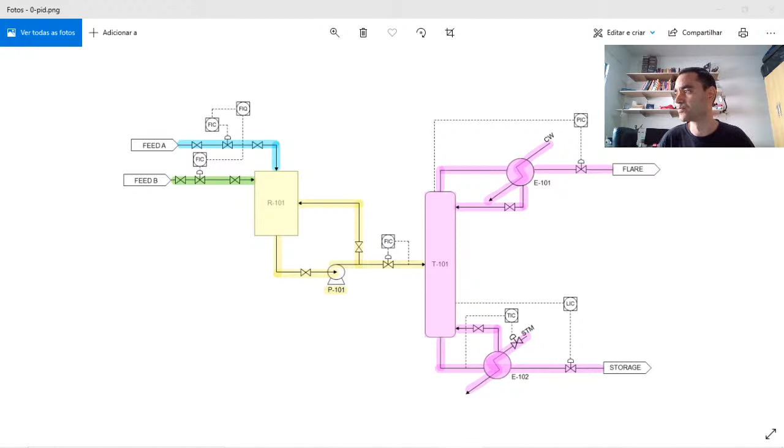Let's see here. Let me share with you another drawing.

So you can see here that it's a very simplified drawing. It's a process flow diagram, and it's a good start. As a fresher or an experienced process engineer, you are not supposed to lead a HAZOP meeting. But when we are getting more experienced, it's not desired, but people expect that you are able to lead HAZOP meetings. And a difference between these that you can see is very simple: we have only the main controls and the main equipment.

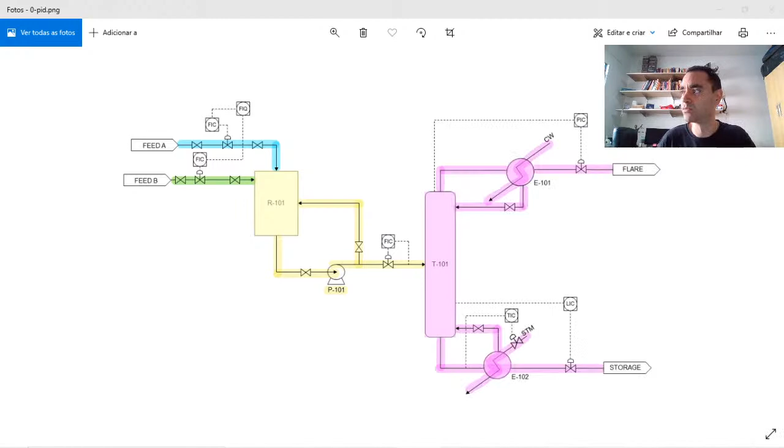Now I will share with you the pipe instrumentation diagram sheet. I removed the stamp, and you will see that the drawing is different because in the pipe instrumentation diagram we have the line name, the line tag, we have field instrumentation, and we have the alarms shown in the drawing. So the main document to be used during the HAZOP is the pipe instrumentation diagram. Although we need some other documentation to support the HAZOP, like the layout or the safety data sheet of the components, the truth is that the pipe instrumentation diagram is the main document if we are talking about industrial design, facilities related to chemical, petrochemical, oil and gas industry.

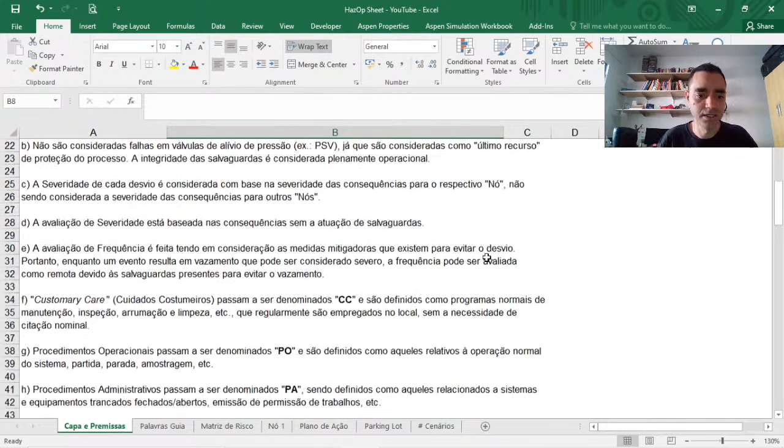And what I wanted to show you here is that we have in this system, it was a system with 4 subsystems.

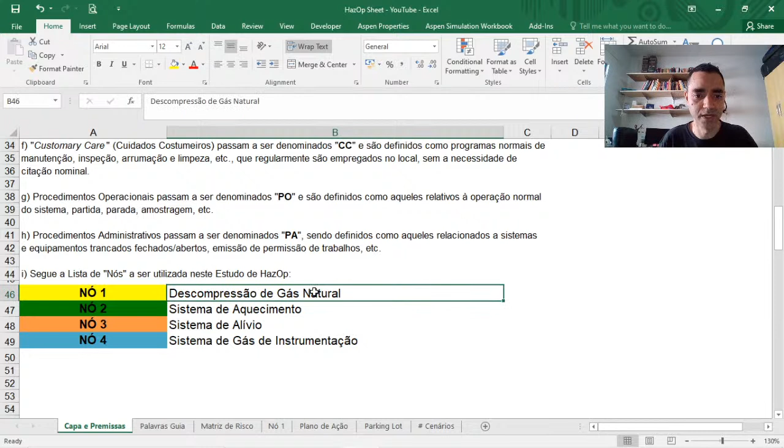So there was the decompression of natural gas, a heating system, the relief system, and instrument gas system.

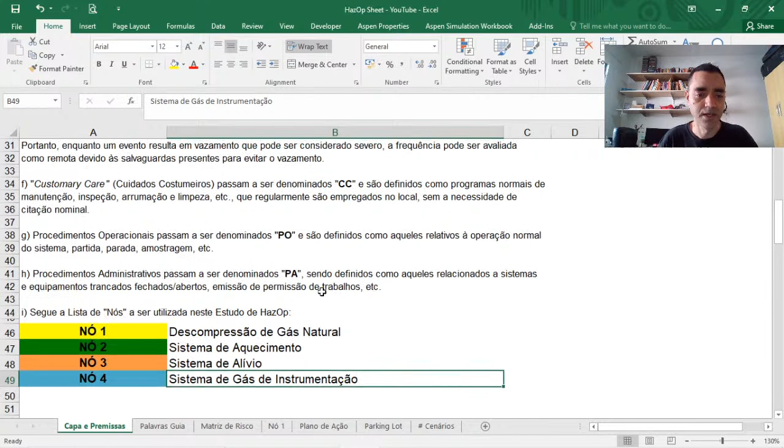We need to have well defined what are the premises of the HAZOP before starting the meeting, and sharing that information with the HAZOP team.

Before starting the HAZOP, it's very important that people are familiar with the process. The HAZOP meeting is not the time for people to get familiar with the process, because it will take a lot of time for everyone to understand what's happening and what's not happening. The HAZOP is to evaluate hazard and do hazard analysis, not to talk about the scope of the project.

It happens a lot if the team is not familiar with the process. It's not the time to solve specific issues. It's not during the HAZOP meeting that you fill an action plan - specific issues should be evaluated after the HAZOP meeting.

What I recommend, if you are leading this kind of process, is to prepare the material before the meeting and share it with people beforehand so they get familiar with it.

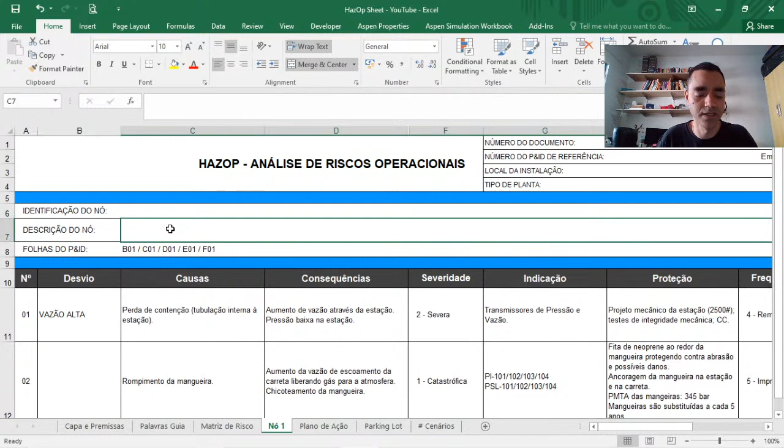So what I want to show you is that in a HAZOP meeting, we have the deviation, and the deviation is related to the guiding words. So the guiding words will help you to identify the deviations of the process. And what is the high pressure in a HAZOP analysis? The high pressure, low pressure, or the guiding word high, guiding word low, is higher above the normal operating conditions or less than normal operating conditions.

If I have a process that can operate between 10 and 20 bar G, what I will consider as high pressure is what is above 20 bar G, okay? And when I say operating range, it is different from the design range of a system.

So here in the node, we will identify the deviation, and with the guiding words, it is high flow in this case. In the node, we will identify what are the causes of this high flow in the node.

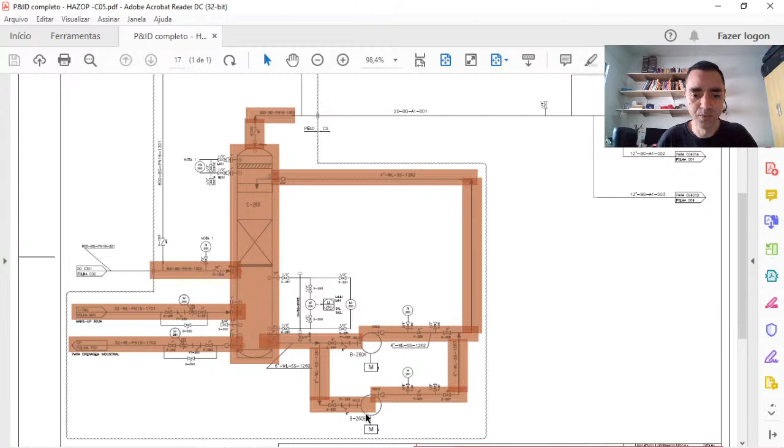Let's suppose that we are verifying... let me return here. Let's take this drawing as reference. It is not the same drawing that was used in that spreadsheet, just to clarify to you. But let's suppose we are evaluating the high flow in this node, and we are evaluating the high flow at the discharge of the pump. What can lead to a high flow at the discharge of the pump?

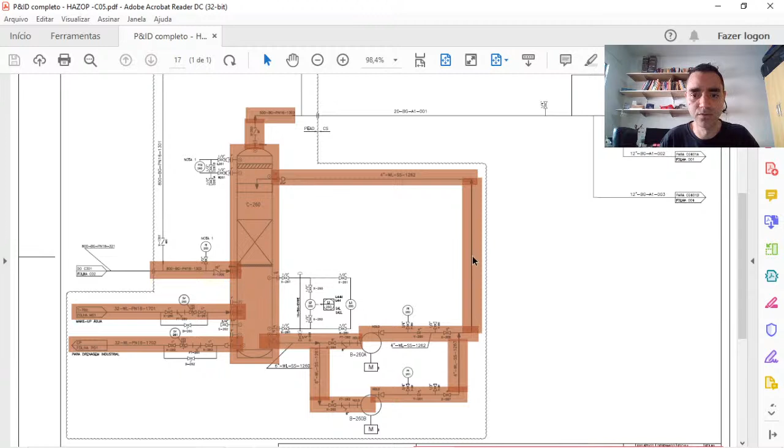And I can have high flow also if my tube ruptures for any reason. So if the tube ruptures, I will not have the pressure drop against the pump discharge, and I will lead to more flow through this segment.

So we list the consequences in the consequence tab, or the consequence column, and we verify what is the severity of that consequence, considering that we don't have any kind of safeguard to prevent the process from that. So the severity you will find based on the matrix of risk.

So I have the severities from neglectable - desprezável, and I'm not so sure if desprezável in Portuguese translates exactly to neglectable in English, okay? And we have moderate, severe, and catastrophic. So based on that, we choose what addresses more to the analysis.

And we need to have, before starting the HAZOP, a parameter to classify what is severe, what is neglectable. So we have here categories of severity. What is neglectable is an operation problem that is recoverable. So if it's something that is an operation problem but it's recoverable, I can classify it as neglectable. However, if the issue that happens can kill someone - internal influence - or if it can lead to multiple injuries outside my plant, I can classify that as catastrophic.

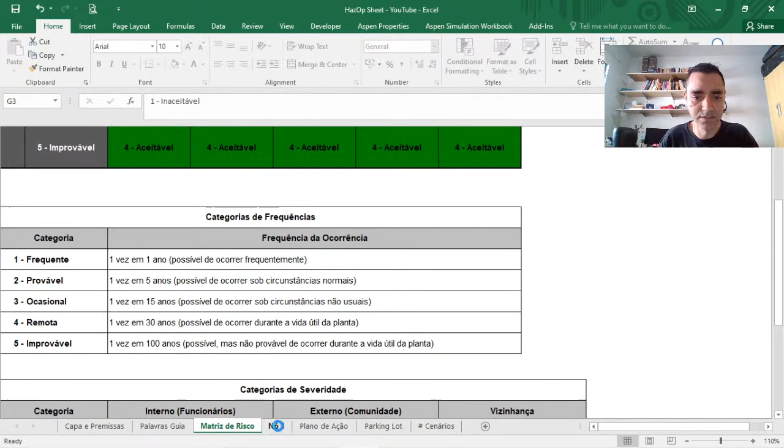If it's one time in 5 years, it's probable, and it's this way. So here, the chances that I have to break my pipeline, if I break the pipeline, what happens? Is it something severe? No, because at first sight I have water, recirculation water. So probably the severity is not high, it's a low severity.

And what kind of indication do I have in this case? We go to the instrumentation of the process, we go to the procedures of the process, and we verify how it's possible to identify that the deviation happens in a process. In this case, what I have is the level of the column, because I have an operating level, and if it decreases too much, I will know that, because in a recirculation loop it should be constant or more or less constant, since I have blowdowns from time to time.

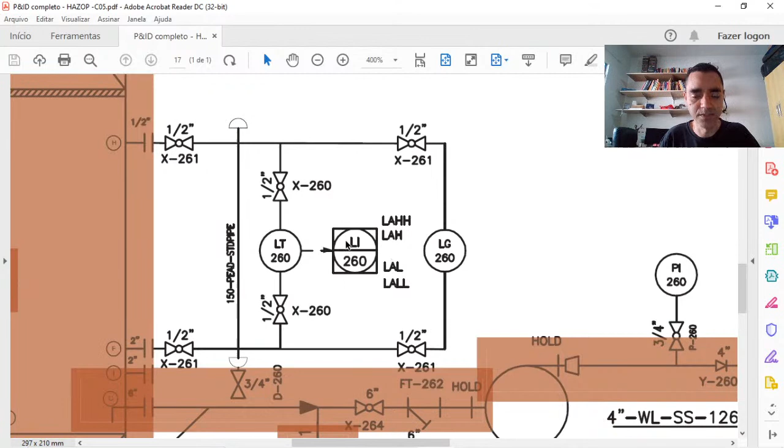And we add here the identification of the instrumentation. Here you can see that it is done in a generic way. That is not recommended. What is recommended is to inform the instrumentation tag. So for instance, in this case, we'll say that we have LI 260 that informs me if I'm losing the level of the column. So this way, I go to the team, or the HAZOP leader most often that fills this table, and I add the information here.

And the next column is related to protection. What protects the process from the hazard or from the deviation caused by high flow? What protects it is the design. I have chosen a material that handles the pressure and temperature of the system, so it will not break because of the process conditions. And it is located on the plot plan in a way that I don't have a truck that can crash into this vessel. So this is the protection that I can explain here in the protection column.

And based on the indications I have and the protection I have, it's time to classify how often this cause happens with this deviation. So here we consider all the safeguards, and we can classify it, for instance, as remote, because with all of these it's not expected to happen. How much is remote? In 30 years, I don't expect to have this kind of issue in my plant. So this is a reference that we have.

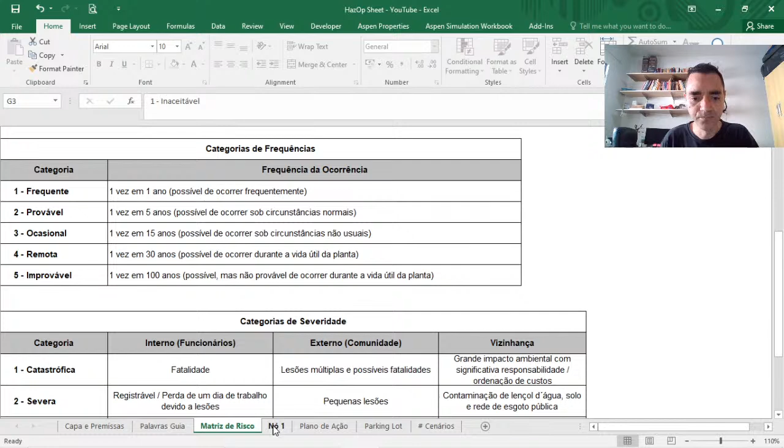So based on the severity and based on the frequency, the table does automatic classification. In this case, in the spreadsheet it is filled automatically, so we got to here. Let's change it. So, negligible. You can see that the risk is acceptable, and I am in the green region of my risk matrix. So should I add any other instrumentation, or create any other procedure to the system related to this deviation? At first sight, no, because it's already safe for operations, so you don't need to spend more time than needed to increase the safety of the process related to this deviation.

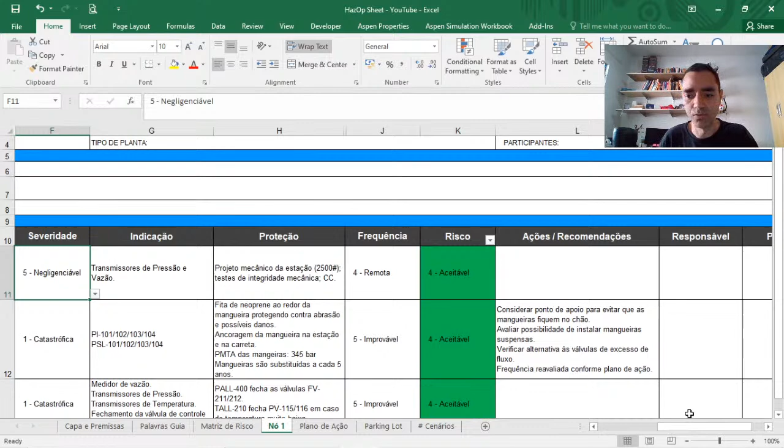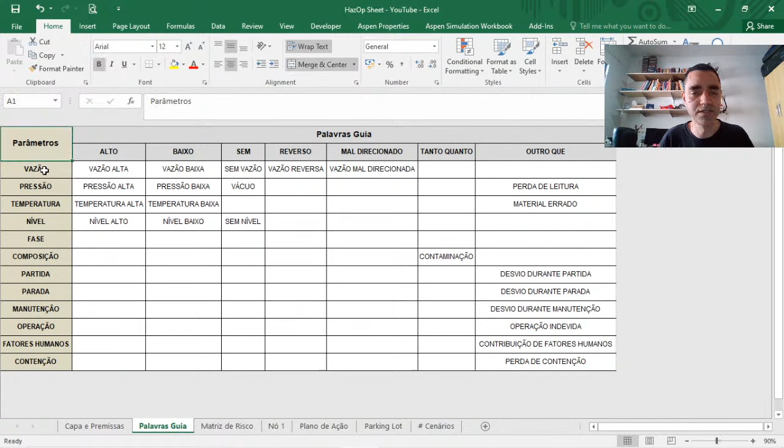So what the HAZOP does is to get the guiding words, and now instead of talking about high flow, we'll talk about less flow. And when we finish the flow parameter, let's go to the pressure parameter, and what can lead to high pressure, what can lead to less pressure, and we use all the parameters that make sense for that node. In this way, we will have the analysis of our system.

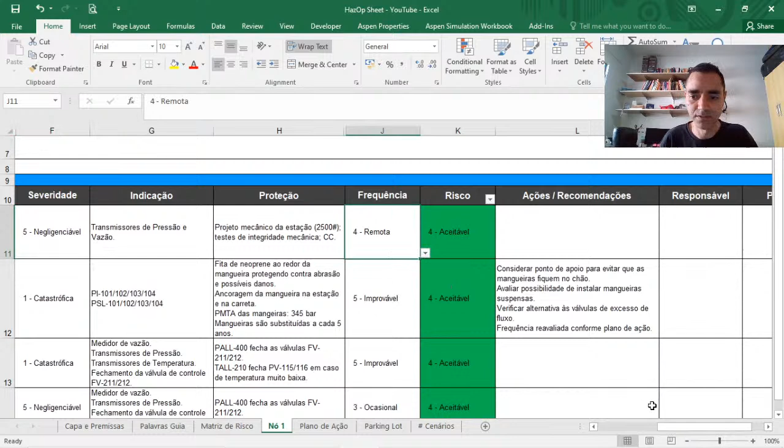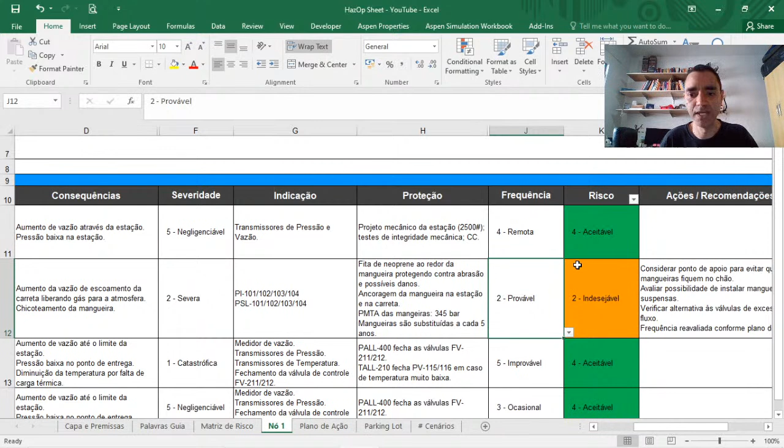And when we have some kind of issue, let me return here. Let's suppose that we have another deviation here, and it is severe. Let me change here. So if we get into a region of the risk matrix that is not acceptable, we need to address an action to solve that.

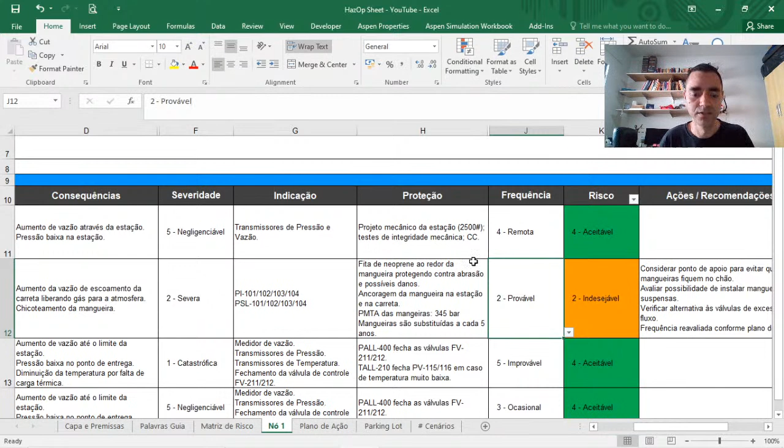So that's where we go to the action plan sheet. In the action plan sheet, everything that is not acceptable or that should be improved is listed, and we have the node number, the item number, and the deviation that is associated with the risk. Here we have this—don't consider that, okay? It is taken from the previous sheet. So we have to solve this, item number 2. And what are the actions recommended?

Usually during the HAZOP meeting, this will be addressed. So we'll have some considerations: revise the calculation, revise the material, verify if the material MAWP is good or not. This kind of action will be registered in the action plan.

What is very important is that the action plan must be finished in a reasonable time, because if you take too much time to solve it, depending on the company, your project will not change to another step or phase. But what is worse is that if you make changes during construction of the plant, it's much more expensive than during the design.

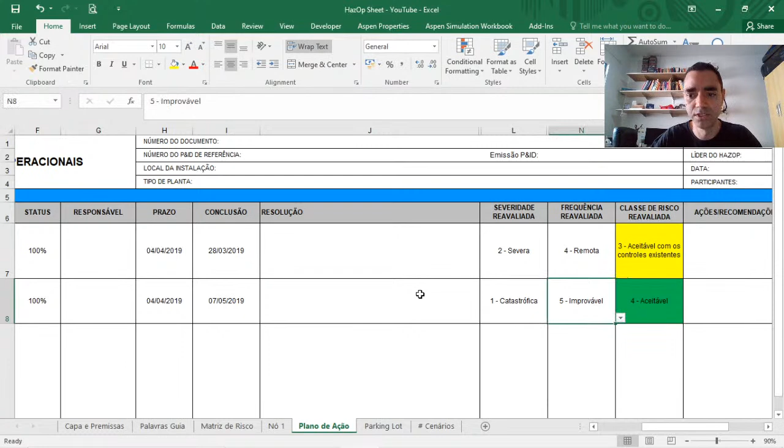And there is a field here for resolution. So the action or recommendation was that, but what was the real resolution for that? We have a field for that. And once we propose a solution, we reevaluate the severity, we evaluate the frequency, and of course it should lead to an acceptable condition, because if it's still not acceptable, something is wrong. Your solution is not a solution. It's only a solution if it gets the region green.

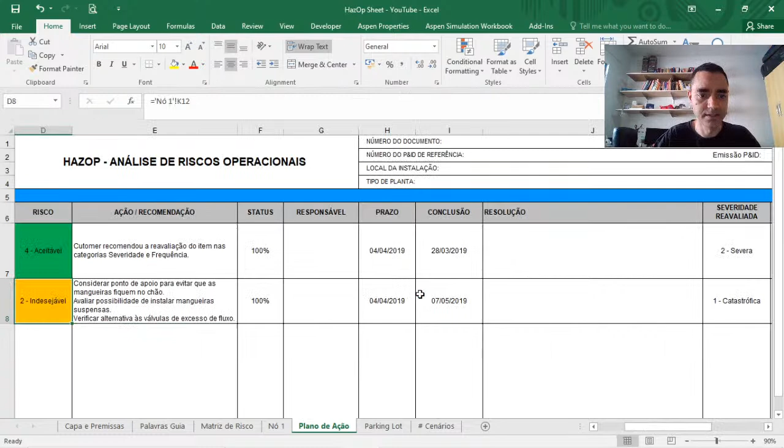And there are some other columns in the spreadsheet for other recommendations, the responsible, and the schedule. Okay, so this is some of the sheets that we have associated with the HAZOP meeting.

And this specific sheet depends on the company. Each one has its specific HAZOP sheet, but in this one we have a sheet named parking lot. That's because sometimes there are issues discussed in the meeting that are not necessarily related to the hazard conditions analysis. So what we do is register that in the parking lot, in order to verify with the customer, for instance, what is the battery limit, where is the battery limit.

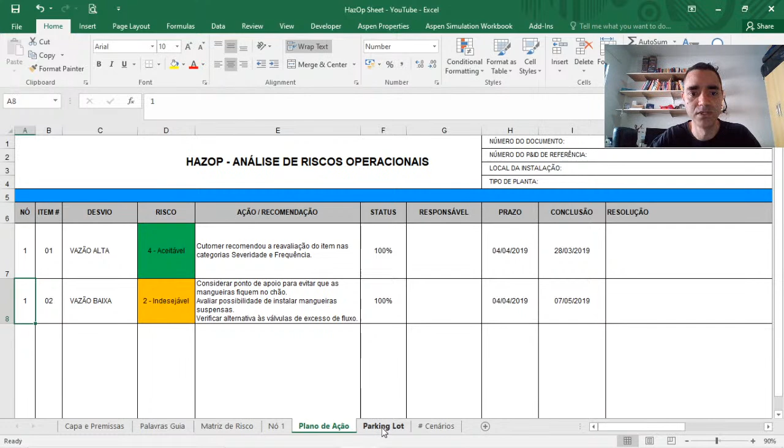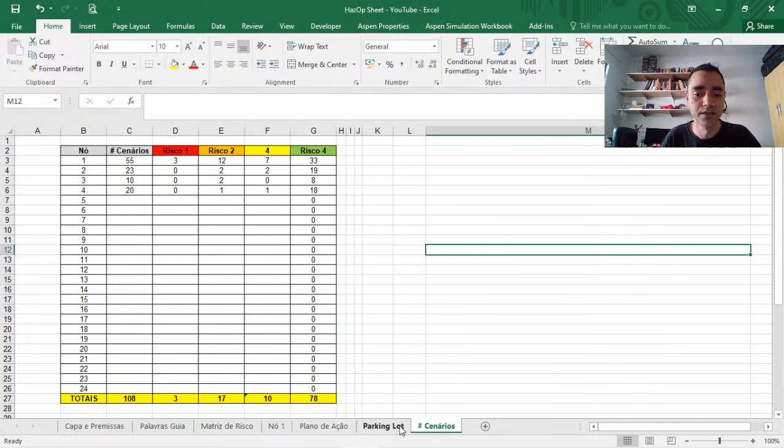So we add this, and as with the action plan, we have also the status, the responsible, the schedule, when it was finished, and what was the resolution. And finally, here we have a summary of all the nodes: how many scenarios were evaluated, how many were red risk, orange risk, yellow risk, and green risk. With all of this, you are ready to develop your HAZOP report, because this is the spreadsheet.

But as I told you, if we are talking about plant design, we are talking about deliverables, and in many cases what happens is that we take this and transport it into a document, a report, so that you have the documentation issued during the project.

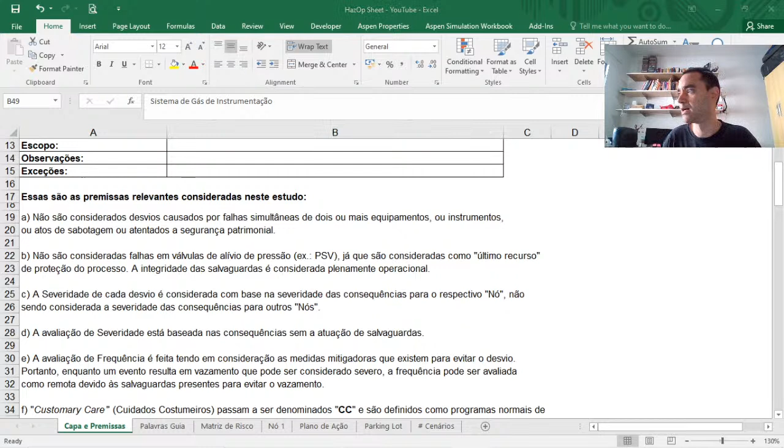So guys, I talked a lot about this, and if you have questions, let me know, because I don't have too much more to add about this moment. I know that it was a summarization, okay guys. There is much more to be added to the subject, but as an introduction, it was what I would like to share with you.